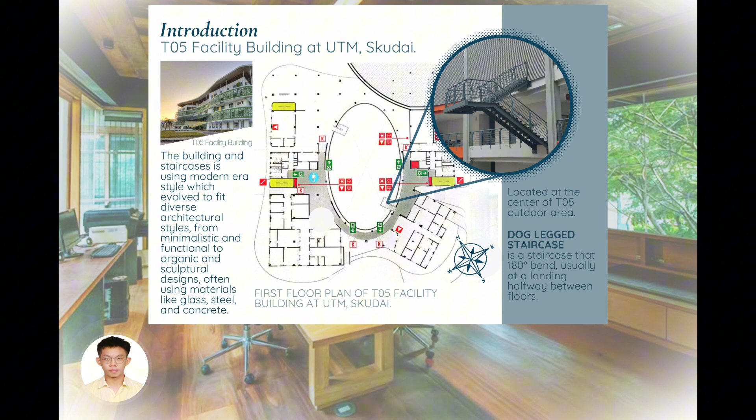About the material used and the design features. The main material used to build these stairs is carbon steel, which is a combination of two elements, iron and carbon. Carbon steel is the most common material used to design metal stairs; it is cost effective, extremely strong and durable to support complex stair designs, and can be finished with many types of coatings.

These stairs have been divided into three parts. The first part is the diamond plate stair tread, which is cost effective for industrial and service stairs. The next one is the multi-line railing, which is very durable for commercial stairs. And the last one is the steel plate stair stringers, a cost-effective stringer for service and egress stairs.

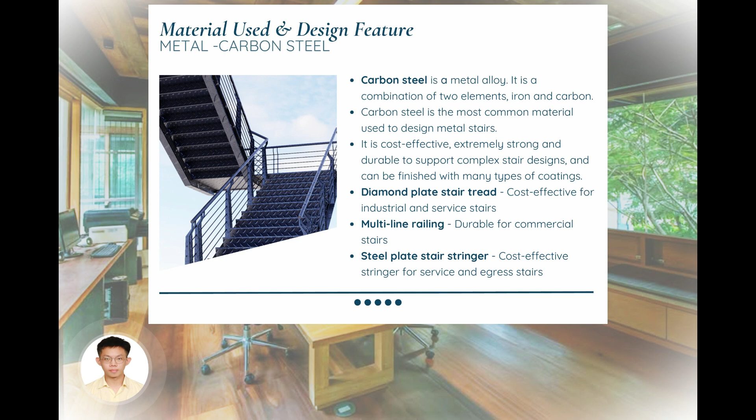Today I will be presenting the design and technical details of a dog-legged staircase. First, let's go through the right view and left view, and last the perspective view, to understand the overall form and structure of the staircase. From the section drawing, we can analyze the key measurements of the staircase. The handrail height is 900 mm, ensuring safety and accessibility, and the landing width measurement is 1550 mm. Each riser is 130 mm, and the tread depth with nosing is 350 mm.

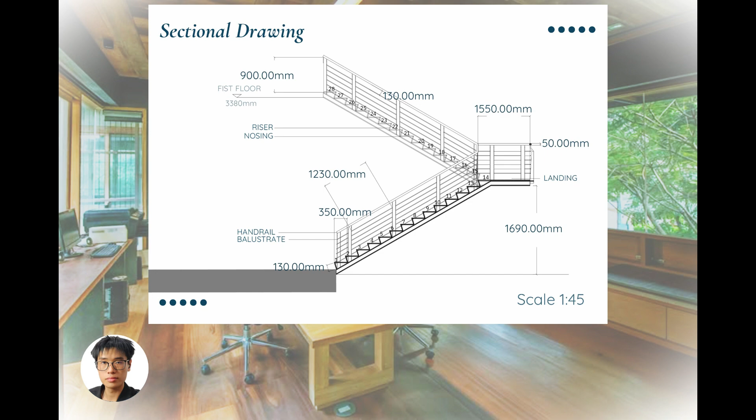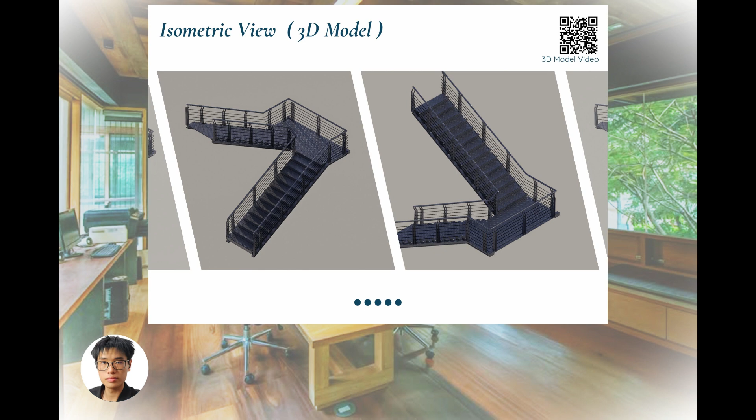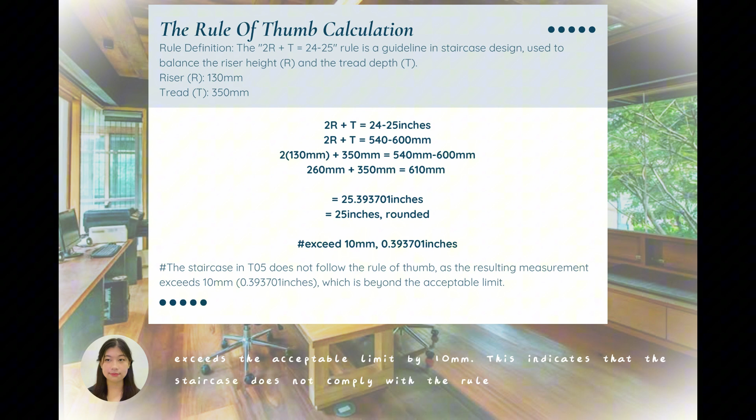This page outlines the rule of thumb calculation. The staircase design uses the formula 2 risers plus tread equals 24 to 25 inches to balance riser height and tread depth. An example calculation shows that the staircase in building T05 exceeds the acceptable limit by 10 mm. This indicates that the staircase does not comply with the rule ensuring safety and comfort.

Moving on to the identification of weaknesses that the staircase in the T05 building has. The staircase of T05 has several weaknesses in terms of material, texture, climate, appearance, and sensory. While carbon steel is a popular choice for metal staircases due to its strength, durability, and cost-effectiveness, it also has several weaknesses that need to be considered.

The first aspect is material. The material of the T05 staircase is basically metal, and metal is exposed to corrosion. Metal stairs are prone to rust and corrosion when exposed to moisture. Other than that, the material is also high in conductivity, which means the metal staircase easily transfers heat and electricity.

The second aspect of weakness is the texture. The staircase at the T05 building has a diamond plate texture. However, even with the diamond plate texture, the tread can still become slippery when wet during rain. Based on our observation, we have seen someone slip down the stairs during rain because the tread was slippery. Moreover, we also found that the handrails are slippery in the rain, so it is quite dangerous for users to use the stairs on rainy days.

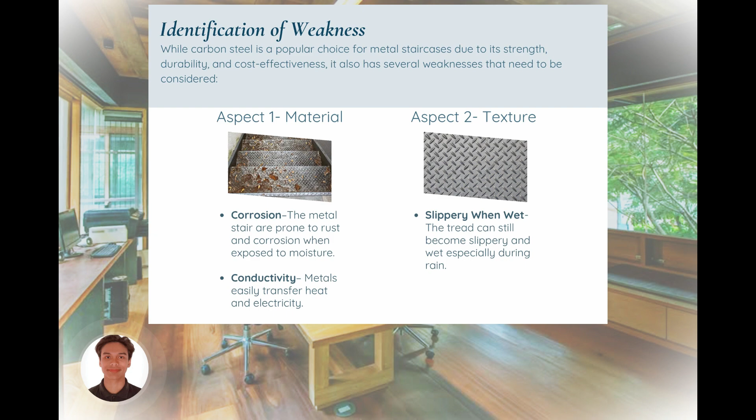The next aspect is the climate. As the staircase at T05 is made of metal, it sometimes gives an unpleasant feeling to users, especially on hot and sunny days. Due to the heat absorbed by the staircase, the handrail becomes very hot, making it unpleasant for users to touch. The next one is the appearance. In terms of aesthetics, some people may find it less appealing compared to wood or other materials.

And the last one is in terms of sensory. Based on our observation, we found that this staircase is noisy when walked on because of the hollow space underneath the stairs. To be specific, the steel plate stair stringers are noisy.

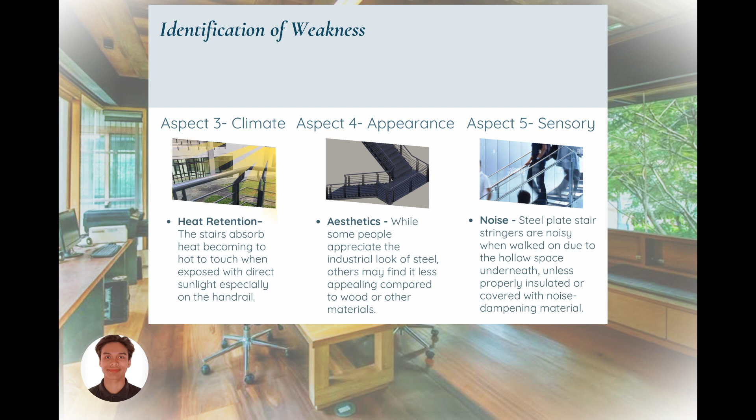Today I will be presenting the compliance status of the stairs in UTM T05 according to the Uniform Building By-Laws. I will be focusing on three main aspects: staircase dimensions, handrails, and maximum flights. The first one is dimension of staircase.

According to UBBL 106, the stair riser height should not exceed 180 mm, while the tread depth must be at least 255 mm. Additionally, landing depths must be equal to or greater than the staircase width. The first one is our survey of UTM T05. We found that the riser height is 130 mm, which complies with the UBBL standard.

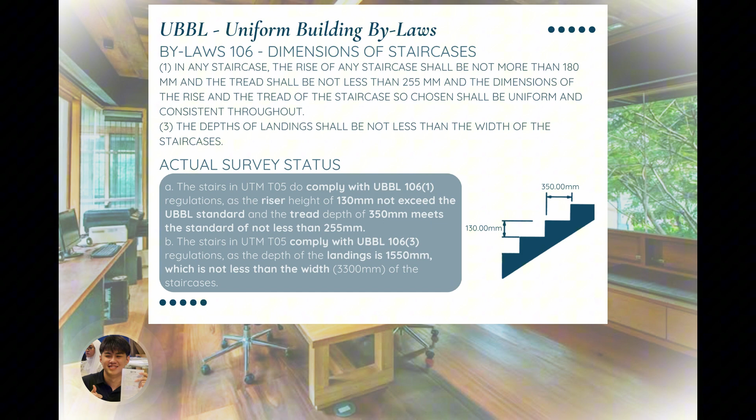The second point is the tread depth is 350 mm, which also meets the minimum requirement of 255 mm. The landing depth is 1550 mm, which is not less than the staircase width, making it comply with UBBL 106. So overall, the stairs in UTM T05 comply with UBBL 106.

The second one is handrails. It is UBBL by-law 107. UBBL 107 states that, first, every staircase with 4 or more risers must have at least one handrail. The second point is the handrail should project no more than 100 mm from the wall and be located between 825 mm and 900 mm from the stair tread. The third point is the handrail at landing must be at least 900 mm high.

Our surveys show that the stairs in UTM T05 have at least one handrail, so they comply with UBBL 107. However, the handrails project no more than 100 mm from the wall and are within the required height of 825 mm to 900 mm, meaning they do not fully comply with UBBL 107. The handrails on landings are 900 mm above the landing, which meets the compliance requirement. Thus, while the stair handrails mostly comply, adjustments are needed to fully meet UBBL 107.

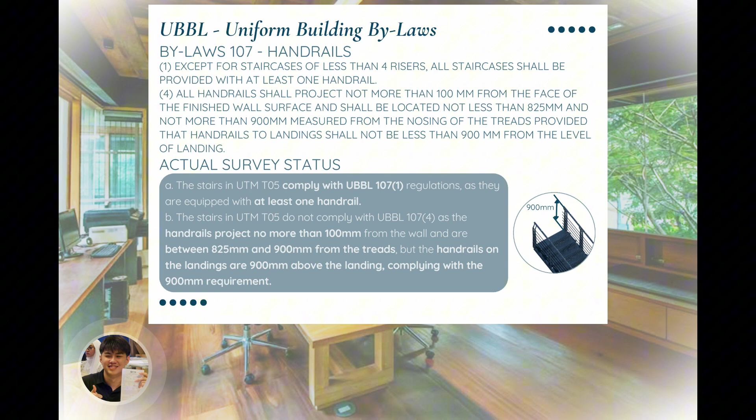The third one is maximum flight, UBBL by-law 108. UBBL 108 states that for residential buildings, the landing depth should be at least 1.8 meters, that is 1800 mm. No staircase flight should have fewer than 2 risers.

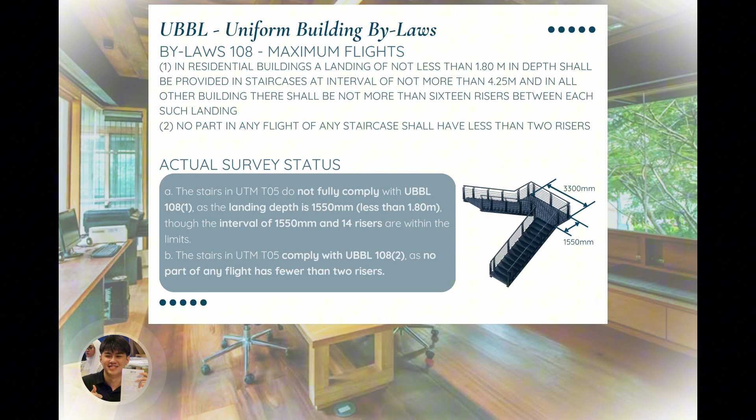From our surveys, the landing depth in UTM T05 is 1550 mm, which is less than the required 1800 mm. So it does not fully comply with UBBL 108. However, the stair flights contain at least 2 risers, meaning they comply with UBBL 108. Overall, the stair flights meet most requirements, but the landing depth needs to increase for full compliance.

Now is the last, UBBL by-law 110, which is no obstruction in staircase. The first question is, there shall be no obstruction in any staircase between the topmost landing thereof and the exit discharge on the ground floor. The answer is, the stairs in UTM T05 comply with UBBL 110, as there is no obstruction in any staircase between the topmost landing thereof and the exit discharge on the ground floor.

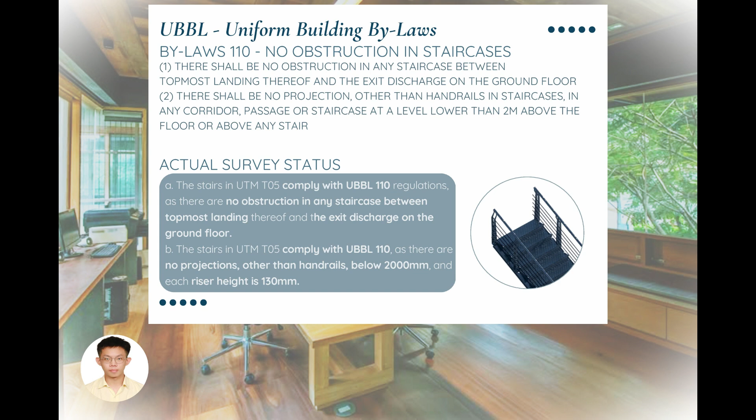The second question is, there shall be no projection other than handrails in any corridor, passage or staircase at a level lower than 2 meters above the floor or above any stairs. The answer is, the stairs in UTM T05 comply with UBBL 110, as there are no projections other than handrails below 2000 millimeters, and each riser height is 130 millimeters.

Here are some reflections from my group members and me based on our study of the staircase. The staircase in T05 does not follow the rule of thumb, as the resulting measurement exceeds 10 mm. From the study, I learned how to use a steel structure to build a staircase, benefiting from its cost effectiveness. As for my reflection, I found out that the staircase has some weaknesses when users have to consider their safety from falling on a slippery tread.

However, even though the staircase has several weaknesses, some of them can be improved. For example, as for sensory, it can be properly insulated and covered with noise dampening material to avoid noisy sound when walked on. So, from this project, I learned that building a staircase is not an easy project. You need a lot of consideration to build a simple staircase. And this T05 building staircase needs a lot of changes due to its safety issues.

For the summary, the stairs in UTM T05 mostly comply with UBBL regulations. However, some adjustments are required. First, the landing depth should be at least 1800 mm. Second, the handrail projection should comply with UBBL 107. Third, ensuring tread depth remains consistent with standards. With these modifications, the UTM T05 stairs can achieve full UBBL compliance, ensuring better safety and usability.